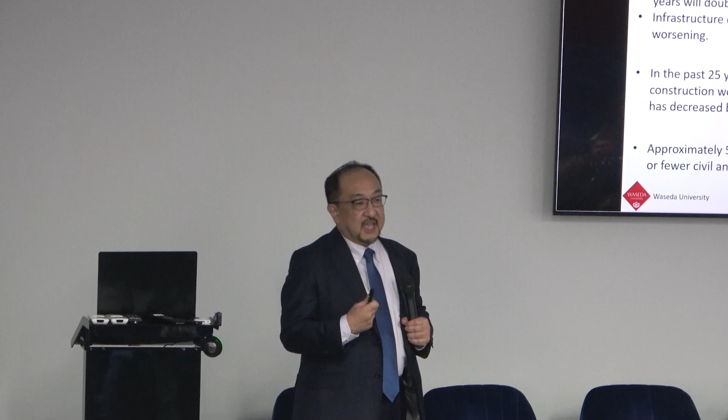Also, I want to summarize our current issues and challenges. In the construction industry, I'm not sure in Romania, but in Japan, our construction industry doesn't like high technology. We love low tech. But our government pushes us to introduce more new technology, such as automation adoption. And also, as I mentioned, aging infrastructure in Japan. Most of the bridges were constructed before 1990.

We had the Tokyo Olympic Games in 2020. Due to COVID, it was actually held in 2021. But the previous Tokyo Olympic Games were held in 1964, and at that time, we constructed many bridges. So we are facing aging of these bridges. And also, as I mentioned, population decline. So how can we maintain these bridges under these very difficult situations? Aging of bridges, aging of Japanese, and now we are facing a very serious issue of budget.

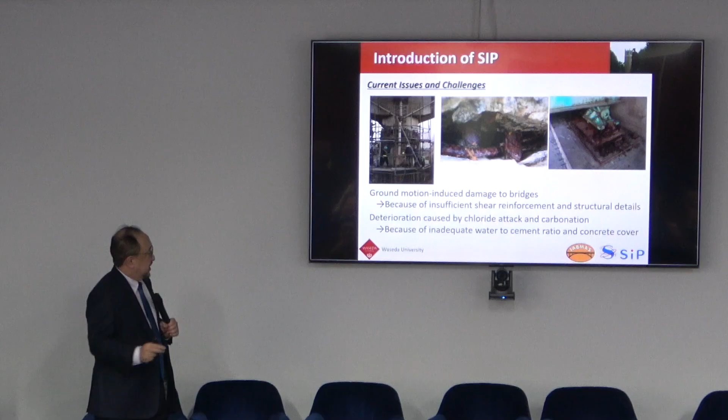So similar to maintenance issues and aging, we know what the problem is. I'm a professor of structural engineering, and I'm very interested in concrete structures. And I can say what the issues of existing concrete bridges are. The main part is ground motion induced damage. If bridges are designed according to design specifications issued before 1990, they don't have sufficient shear reinforcement to prevent shear failure, brittle failure. And also structural details are not good.

You can see on the left picture, this shows the damage at the cutoff of longitudinal rebars. So shear failure and this cutoff failure are typical failure modes of RC columns in Japan. And also, all the concrete components have a very difficult problem because they were constructed with a very high water to cement ratio. At that time, they didn't know. If the water to cement ratio is high, this causes very big issues with carbonation or chloride.

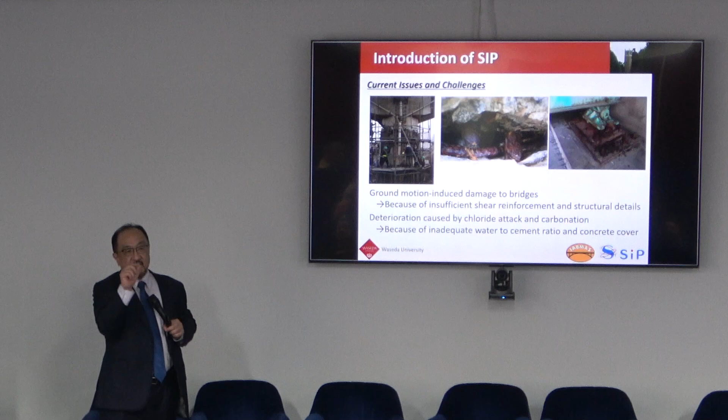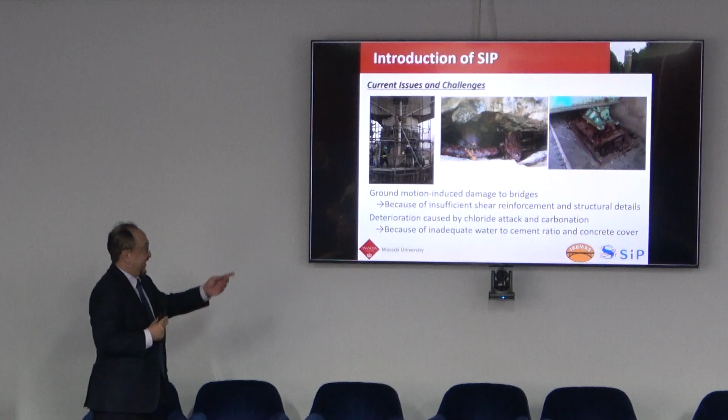And also, previous concrete structures have very small concrete cover, only 10 millimeters, sometimes 20 millimeters. Now, minimum concrete cover is like 60 millimeters, 70 millimeters, depending on the chloride environment. So anyhow, we know what the issues are. These are two major issues of RC components in Japan. We know these problems, but it's not easy to maintain and repair all the bridges.

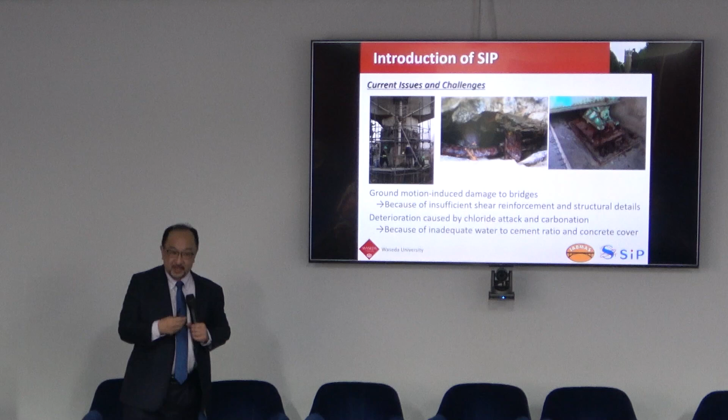So now we are trying to fix these issues in the SIP program with 5 sub-projects, from project A to project E, okay? So the budget is really big. Every year we can have about 40 million euro. But our government is very strict. Every year they evaluate our activity, and if our activity is not enough, they cut our budget. Very strict.

So now I'm working in this SIP as a sub-project director. So I always need to explain how we are working well to governing board members. Governing board members belong to the cabinet office. So to get a big budget, I always need to explain how we are doing well. And also, we have a project manager to control each sub-project from A to E. So I will explain our managing team members.

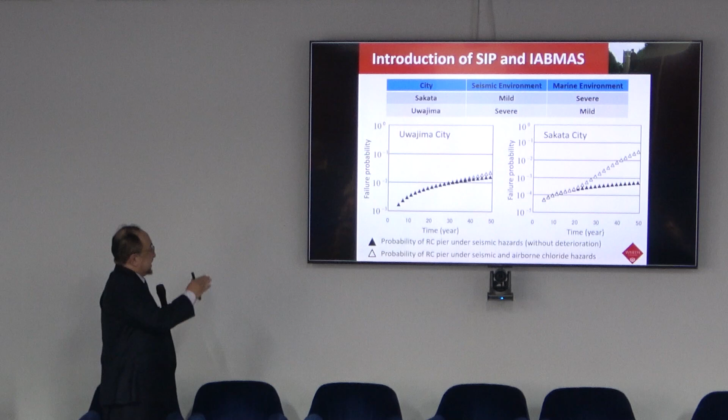Uwajima city faces the Nankai Trough, which is our serious concern for a future earthquake event. So Uwajima city is located in a very high seismic hazard area, but the marine environment is very mild, for RC bridges located in Sakata city and Uwajima city. My computational result is like this. At the beginning, we have to care about seismic hazard, so the failure probability of RC bridges in Uwajima city is high.

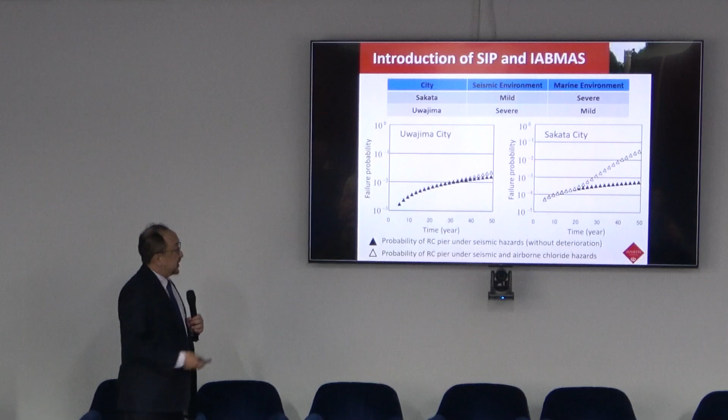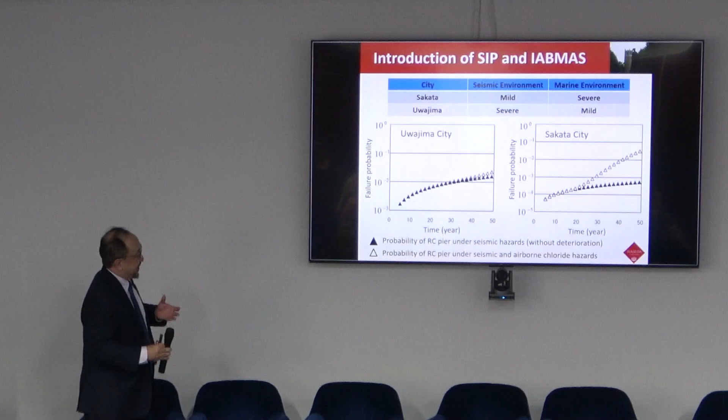However, if we consider a long-term lifetime, like 50 years, the failure probability of RC bridges in Sakata city is finally higher than that in Uwajima city. This is just one example, but it's not so easy to say which bridge should be retrofitted first. Romania and Japan have very similar environments, so it's really challenging for bridge engineers. Not only in this workshop, I really want to keep discussing and working with engineers in Romania on how to maintain our bridges and infrastructure systems to ensure sustainability.

In Japan we have several associations, like the Japan Society of Civil Engineers and the Japan Concrete Institute. So I asked my colleague in Romania, where do you discuss bridge safety and bridge maintenance? I couldn't find a big association. So I asked Professor Dan Frangopol. He's the president of IABMAS, an international association for bridge maintenance and safety. He said it's a good idea to develop an IABMAS Romania group, and with this association we can discuss. As I mentioned in the morning, professors, officers, and practical engineers in industry need to work together to advance bridge maintenance systems.